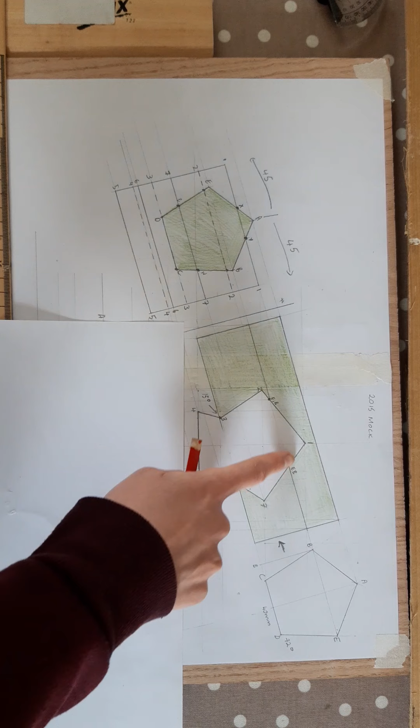2016 mock paper. Okay, this question was an interpenetration question from a number of years ago. There was a number of things that you had to do first. The very first thing I would do is this shape directly in the center. You had all the measurements for it. I would start off with my center line.

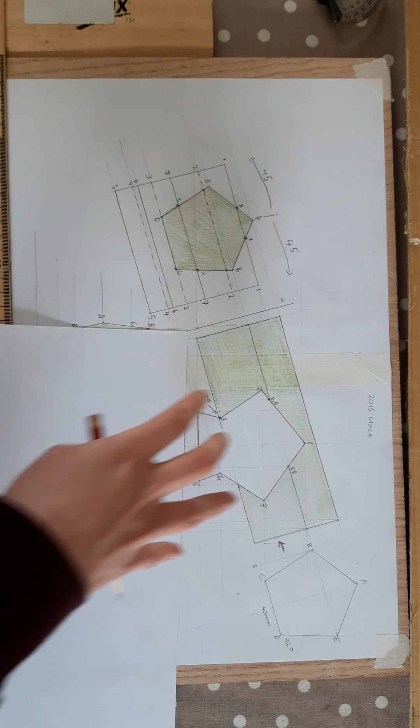You were told this was 50 wide, so 25 either side. Then this was 40, so 20 either side, and so on. I think it was 80, and the overall height you were given it as well. So this shape will find itself, and you'll bring all your points down to plan. It will just be vertical lines because that's all you have, and you know that it's 90 in length.

In order to get this pentagon that's been going through it, this really isn't all that necessary. You can do it down here, and it doesn't matter how far away you do it. So what I would suggest to you is just down from your page, that corner 3 that I've labelled there, you're going to do an angle of 15 degrees. If you measure out 30 from corner 7 and drop your line down, it tells you where it terminates, and also you'll be able to get the bottom point where it touches the XY line and come perpendicular. So you'll be able to get all of this.

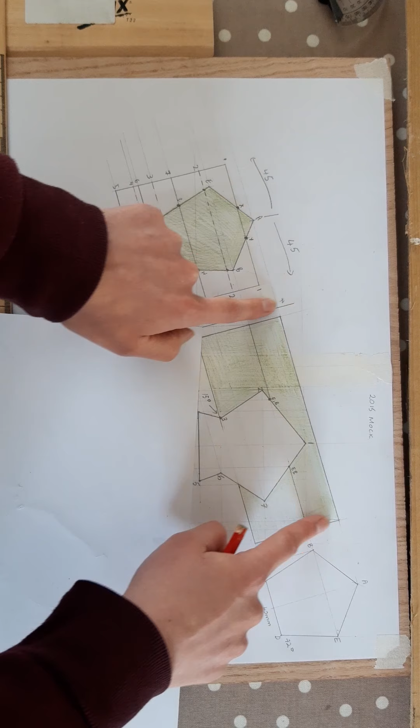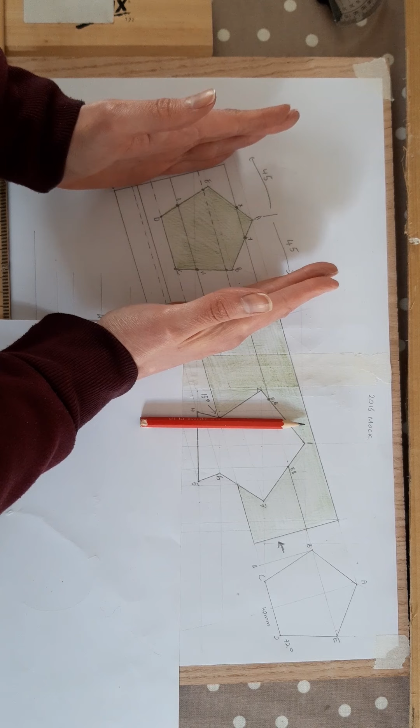In order to get these two lines, you'll need to actually draw the pentagon. To do this, continue down that 15 degree line, doesn't matter how long. Pick anywhere to start. Measure 40, because you're told it's an edge length of 40, 72 degrees either side, and then finish off your pentagon. What people are going to be stuck on then is, how do I position everything down in plan? Well, very straightforward. You were told that in plan the overall width was 90. So from the apex of the pentagon, which I've called A, measure 45 either side.

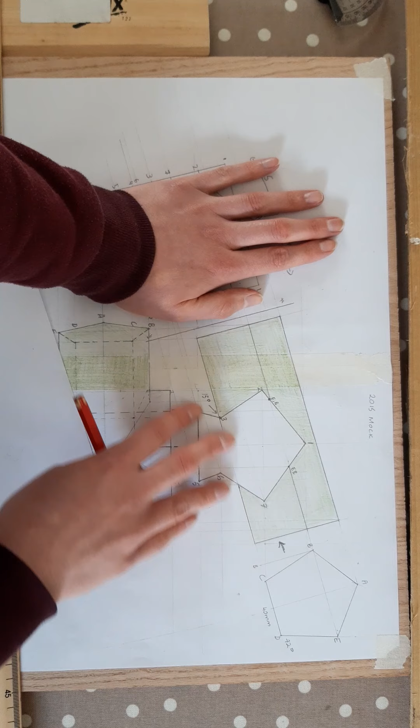You will do this in plan as well. Draw your centre line. Measure 45 either side and have your gap for your end or for your elevation. When it comes to positioning this then, when you've done your 45s either side, whatever this distance is, it should be consistent here as well. And that's where your XY line will go. It doesn't matter if it's overlapping or anything, because you won't need any points really over on this side. So once you have your auxiliary done, your elevation fully finished, you'll be able to then start getting these lines. And I'm going to explain how to get those now.

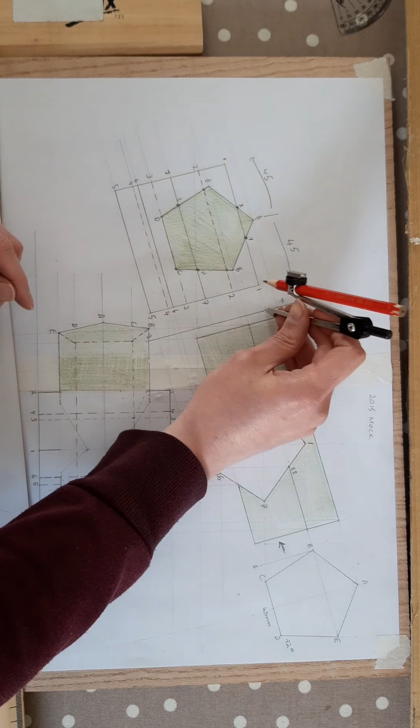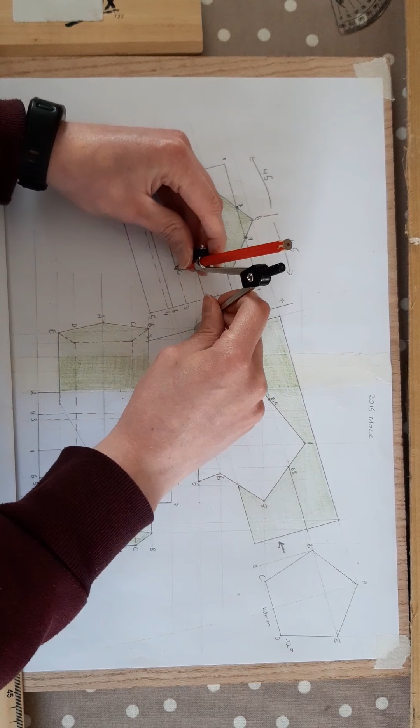To find out where A, B, C, D and E are in plan on both sides, all you're going to do is use your auxiliary. From where you have found the XY line to be, you will measure the distance to A, and from your XY line, you will strike it off and you'll get the position of A. Draw your line in. Then you will get the distance to B. From your XY line, strike it off and you will get B. Draw your line in. Do the same for C, transfer it, D, transfer it, and E. Take the distance, and again from your XY line, transfer it, and you'll get those 5 lines.

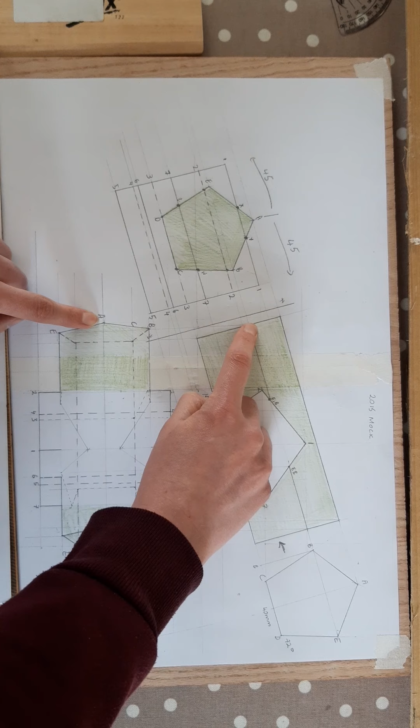In order to get these pentagonal shapes, literally I'm bringing corner A, so I know that's A, bring A down onto my line A, bring B and E onto my lines B and E, and bring C and D onto lines C and D. These are hidden detail because when I'm looking down, I can't see those points. However, on this side, when I look down, I can see all of those 5 points, and they will all be heavy.

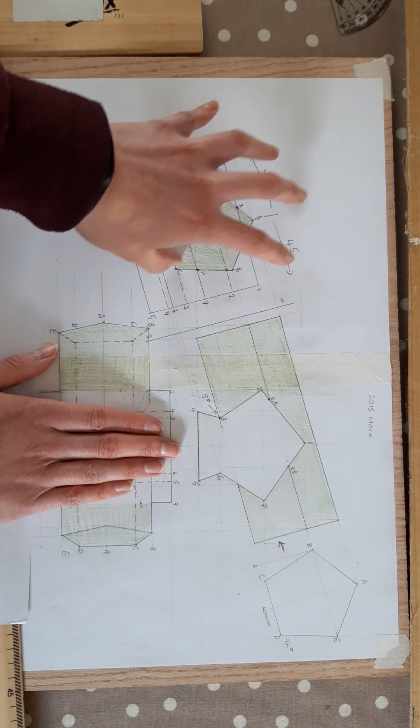As you know from the last 4 questions that we've done, it is getting the interpenetration lines and pierce points that is always the most confusing. But if you never found anything inside there, and you just did this, and you had the plan done just as it is, you have 60% got already, okay? The last remaining 40% is how you finish off and get your pierce points.

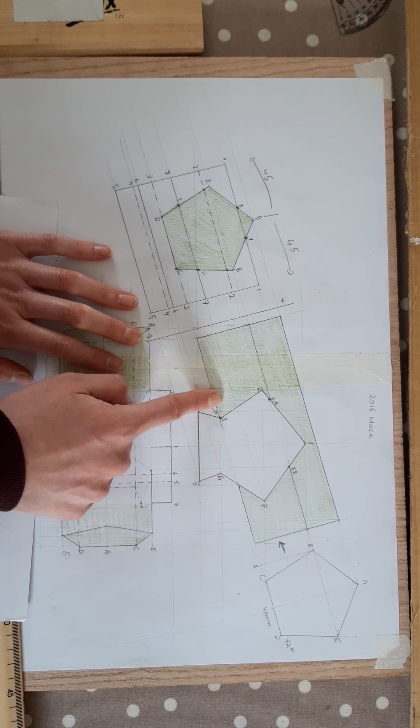The good thing is when you transfer all your points up, this is a sloped surface. The object can't go in anymore. So that's the elevation for the left hand side completely done all the way over here. That's all done. And this object coming into the right hand side isn't actually intersecting this object at all. Yes, you can see it's piercing it, but you just get pierce points. Nothing else. Okay, so the elevation is complete.

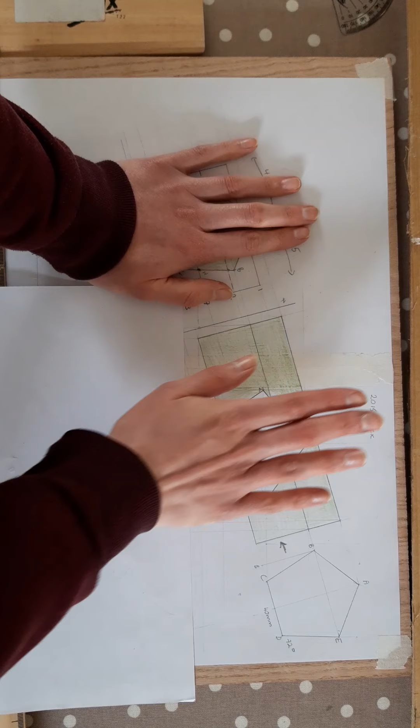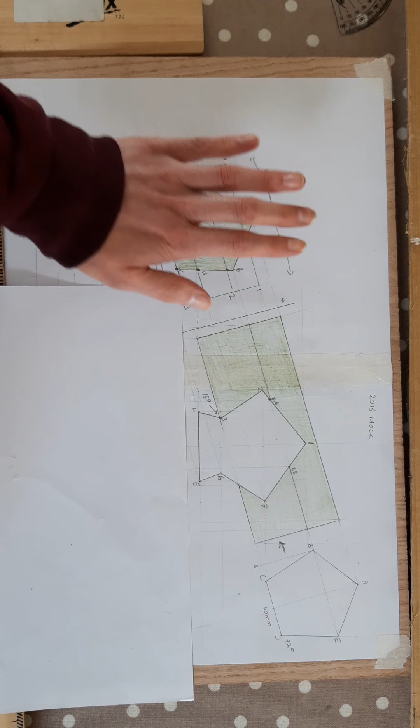When it comes to doing the plan, you are going to be using your auxiliary and your elevation in order to finish the plan. You can see in the auxiliary I've highlighted a number of pierce points. I've called it X and Y. We already have the E and B's. I've highlighted 2 points on the line 2. I've highlighted 2 points on the line 7. And obviously you have your points on the line 3, which are C and D already. This makes it actually quite straightforward to get your plan. But like everything, you need to double check that you've accounted for everything.

Okay, so we can see that corner A is actually not intersecting the object at all. It's outside it, it's not affected, so leave it be. What you really need to find are X and Y. In order to find these points in plan, because when you bring it back you just don't get anything, you need to find these 2 points.

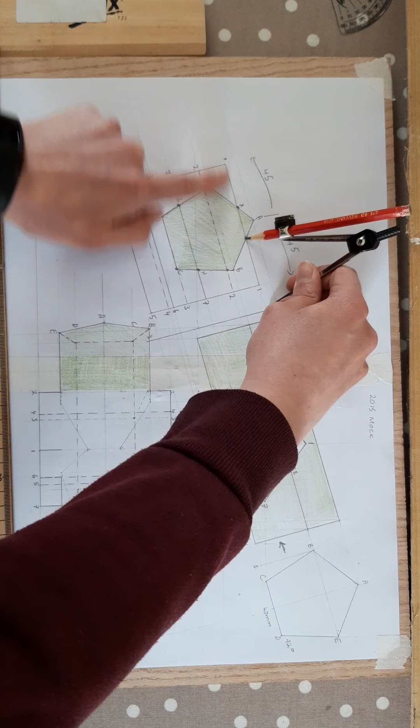Take the distance to Y, and on the line 1, which is this line here, strike it off. You can see I have my point there. I've called it Y. Do the same for X. Take the distance and strike it off. This gets you X. So I've those 2 found and I've them ticked off.

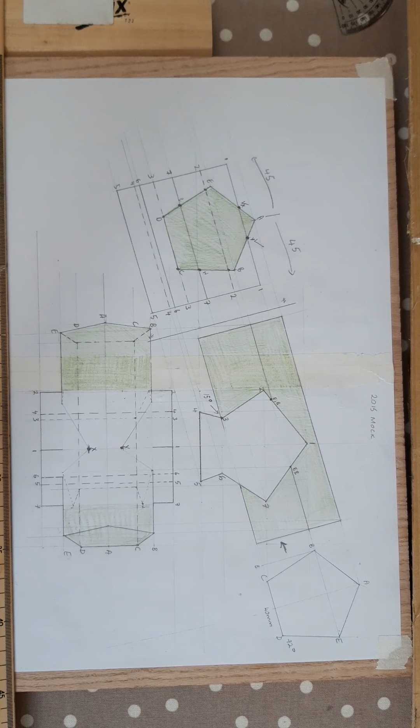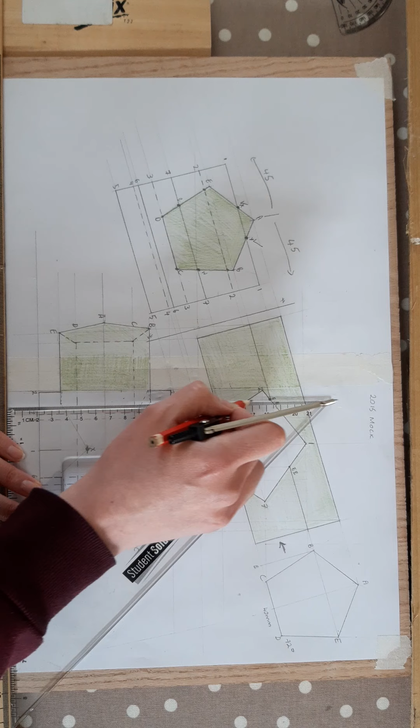The next thing that you need to find are E and B. There's no intersection line, so when I come back to my elevation, E and B have 2 points left and right of the object. When I bring them down onto the correct lines of E and B, I will get 4 points in total. Just to show you where they will be. Bring down E and B, so B is here and E is here.

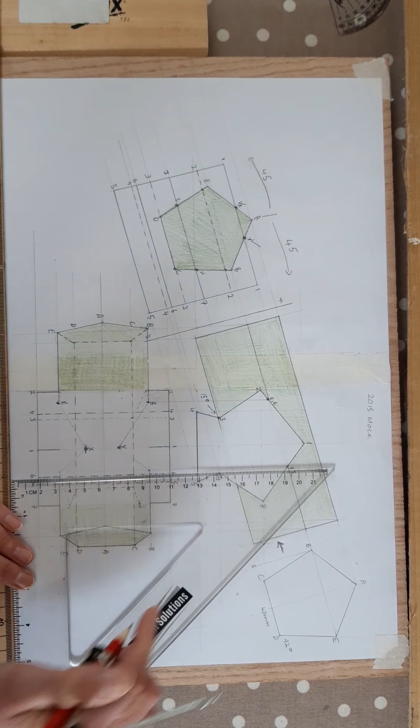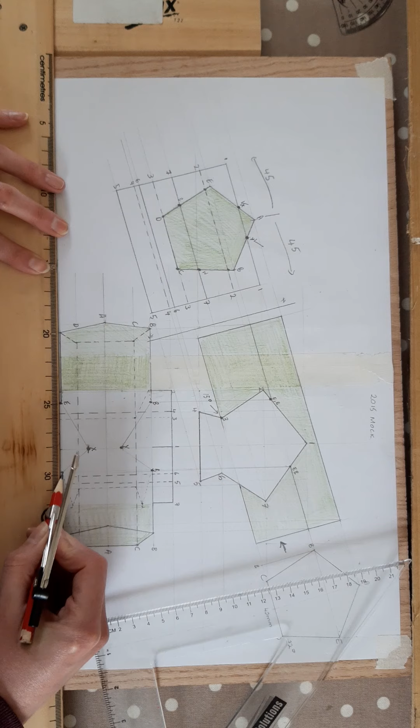Do the same on the other side. So bring it down. That's B, and then down on the bottom is E. What this tells me is these pierced lines are going all the way until here. So in plan, where that point is, that should be a heavy line all the way into there on both sides. Same with B. Continue the line B on until it touches both of those point B's.

So I've got my line of intersection and my pierce points at B, my line of intersection and my pierce point at E. Okay, so I've got those 2 done. The next thing I want to do is find point 2. Okay, now this is actually only intersecting on the left hand side. You don't need to find anything on the right hand side over here. It's just going to be on the left.

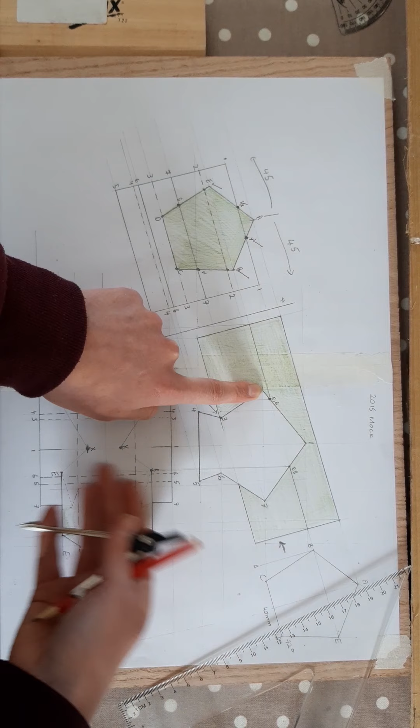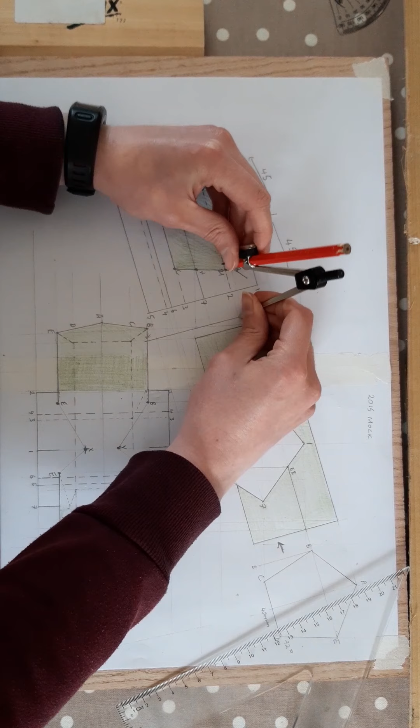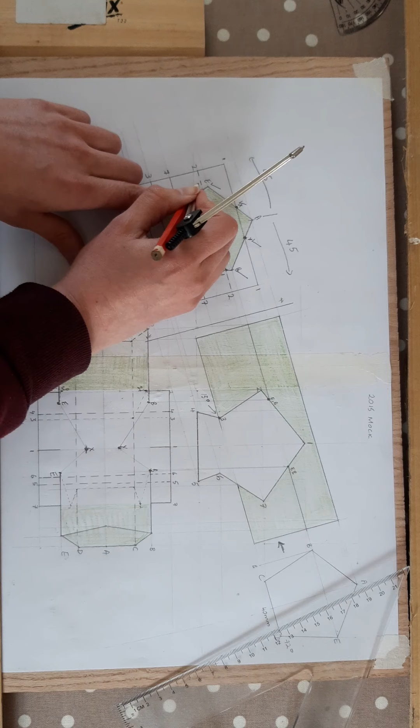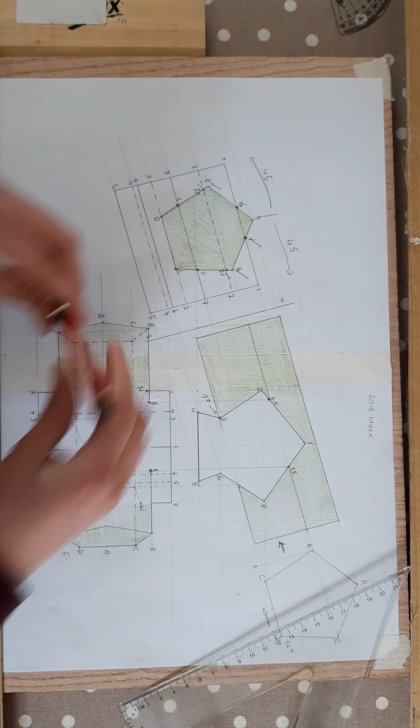The next one will be on the line 7, and I've called them Z and W, but literally just take the distance again and find these 2 points on the line 7, so W on the line 7 is here. I have it marked W, but I'll just do it a little bit heavier. W, and then finally Z on the line 7 again. So that's those 2 done.

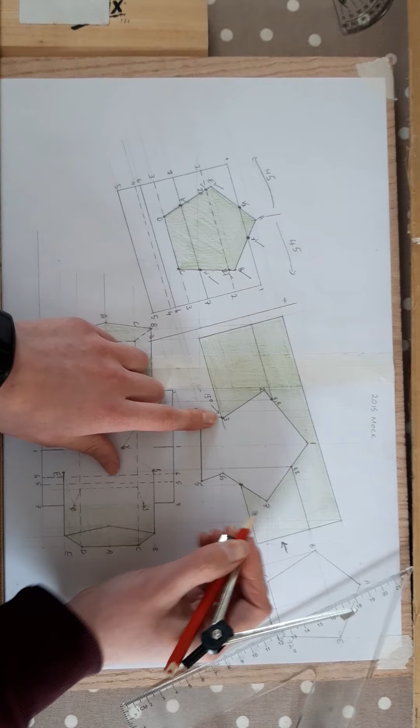And then finally C and D are on the line 3. So that gets you these 2 points. So I need to bring them down onto the line C and D, and I should be getting about 4 points in total. So bring this down, find it on the line 3. So I have it here, C, D, and then finally C, D on the left hand side, right hand side as well.

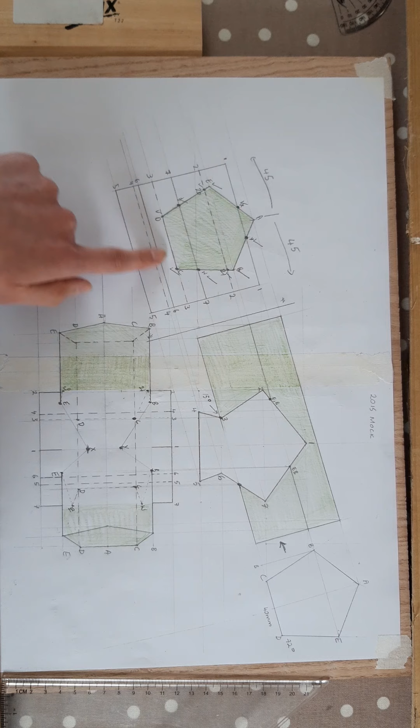As you can see, I've accounted for everything in this. It's now a matter of joining them up. When I'm looking down, I can only see A, X, E, A, Y, B. A is essentially not important anymore. It's just that heavy line, so just bear with me for a minute on that one. So these will be heavy, and anything underneath is going to be hidden detail.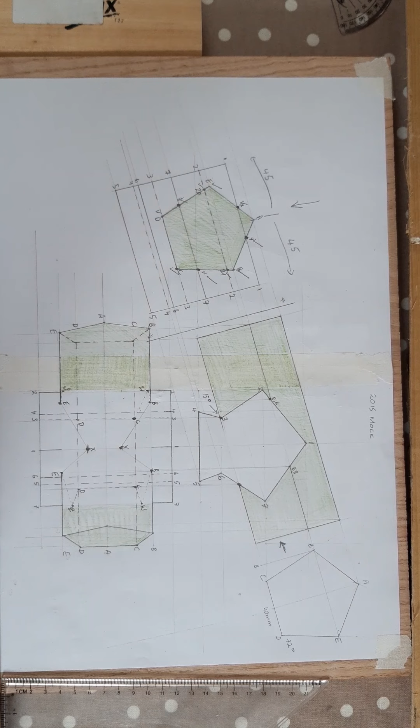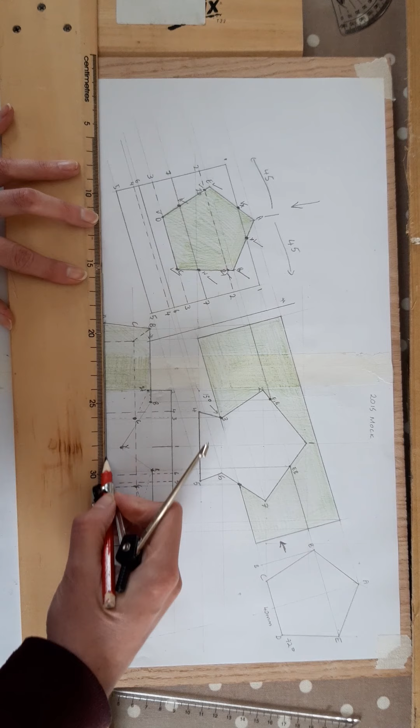So E to 20 is hidden detail, 20 to Z is hidden detail, 20 to D is hidden detail, D to C is hidden detail, C to W is hidden detail, W to 21 is hidden detail, 21 to B is hidden detail. So I'm going to do it chronologically. So A is at the top, it's not intersected by anything. It will be a continuous heavy line on top. So I have A done.

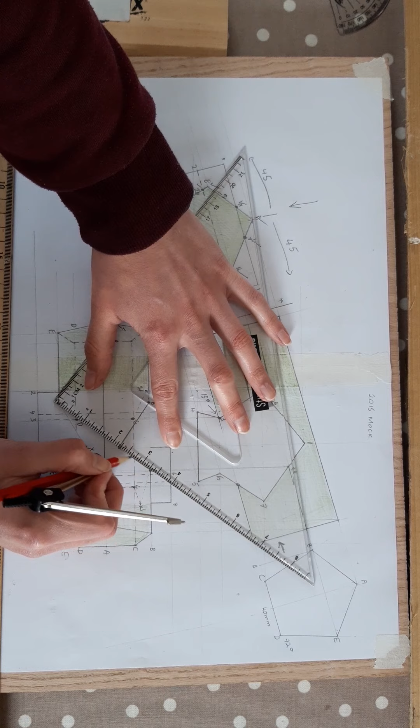Next, I need to account for that X and Y. So Y is going to be joined to B. So there's two Y's to B. So Y to B on the left hand side, Y to B on the right hand side. Now, so I have Y and I have B. B is joined to 21, but as I said earlier on, it has to be hidden detail. So that's on the left hand side. That's a dot, dot, dot, hidden detail to the 21.

That's also done. 21 to W has to be hidden detail as well. Bear with me on that one for a second. 21 goes to C. C joins to D. And again, it's hidden detail. D joins all the way back up to that 20. And 20 goes up to the E, and E goes to X on both sides.

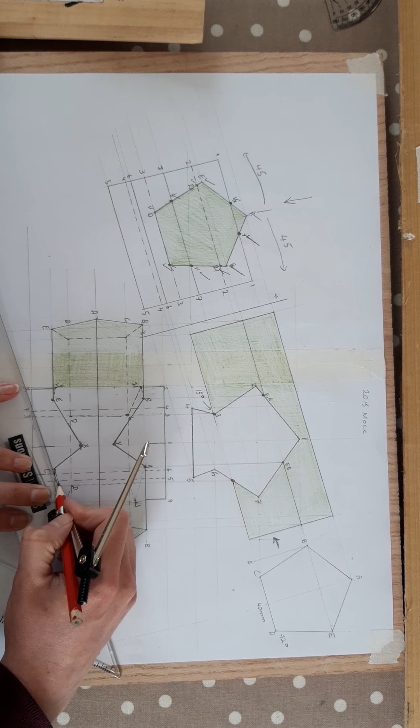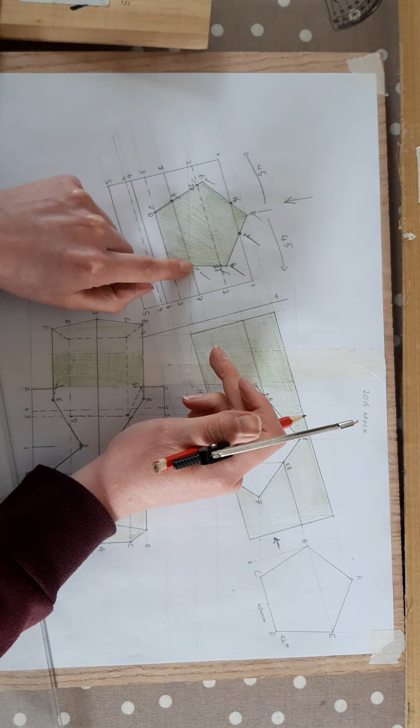E also goes to that Z on the right hand side. Z goes to D. D goes back to C. Hidden detail. C goes to W. And I'm focusing on the heavy lines here now. That's a hidden detail line. So W doesn't go to 21. W goes to B. And B is already joined to Y. And that's it, finished.

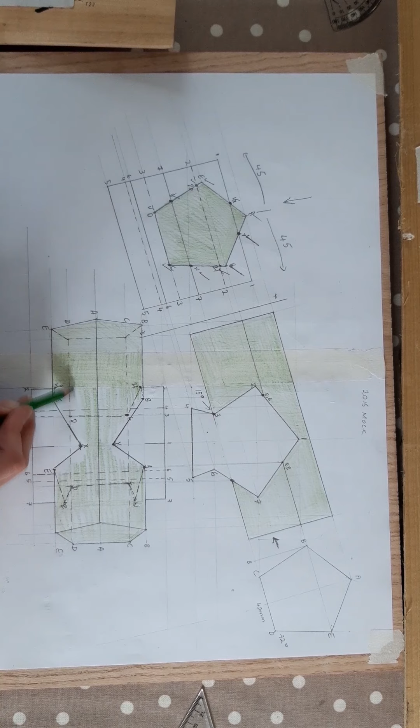Just to show you. Okay, the object goes in. All of this surface. It's good practice to colour it in because you will get very confused, especially when some of the lines are hidden detail and some of the lines are heavy, not everything is joined to each other, and that's what you can see going on the left and right hand side here.